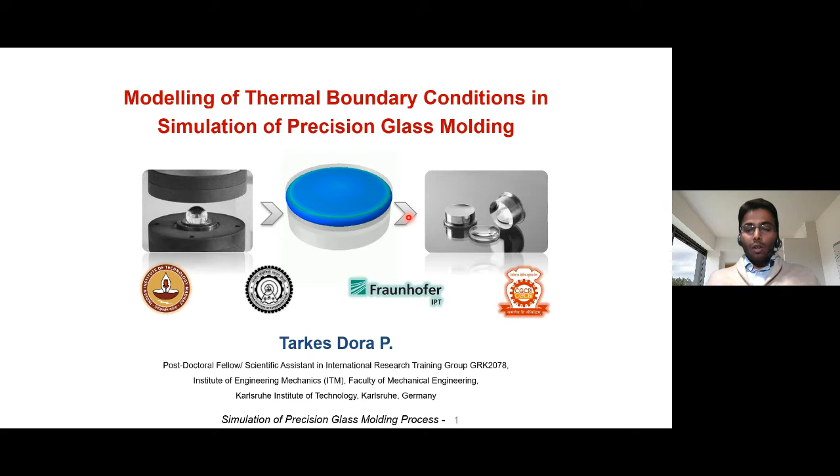With this objective and motivation, I would like to give a short outline of what I will be presenting today. Initially I will talk about the precision glass molding process and the machine, showing how the process happens, which will help you understand the rest of the presentation.

Then I would discuss the challenges in simulating precision glass molding, related to the material model of the glass and the boundary conditions. Then I'd talk about digital photoelasticity of glass, and discuss modeling the heat transfer during the cooling stage of the precision glass molding process, along with some results.

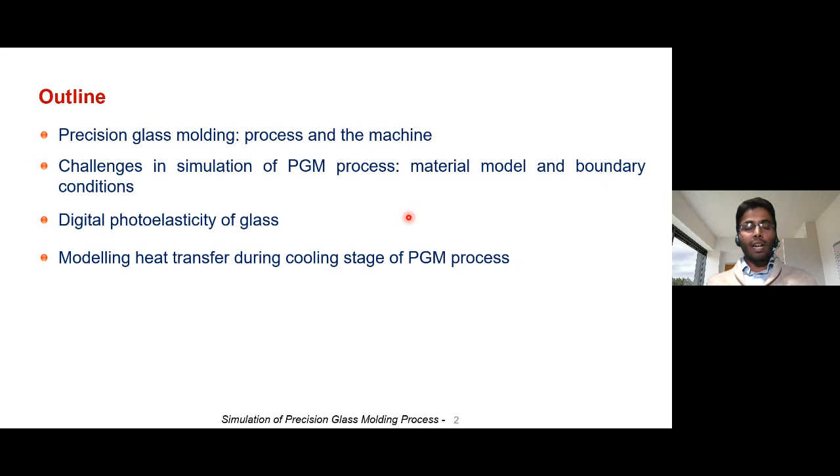Then I'll cover new findings with respect to simulating a sample plano-convex lens. Finally, I'll conclude by discussing the current trends in glass processing technology related to Industry 4.0 and digital twin.

A special message for the bachelor students: you may not understand every aspect of the presentation. That's totally fine, because with your current set of knowledge you may not grasp everything. But you should think about what kind of academic problems you could derive from it, and for your future career and goals, decide what direction you want to go—you could make a mind map out of this.

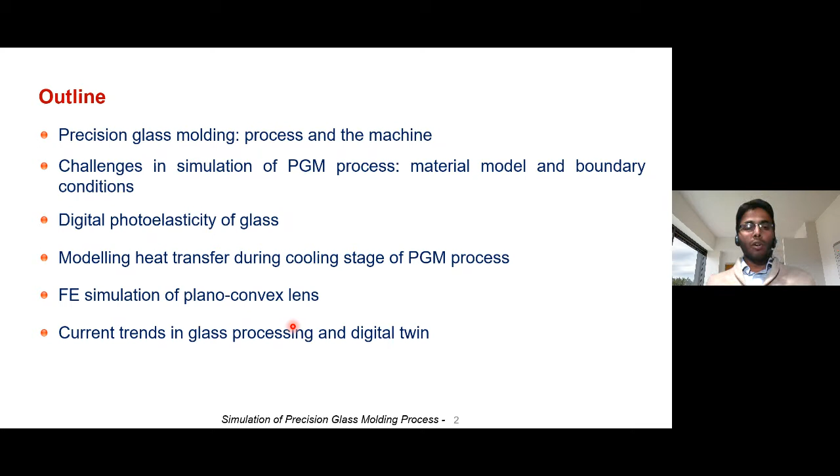Especially in the current trends in glass processing technology and the digital twin, you would get a complete mind map of how the whole engineering community works on fabricating a particular product.

Now let's look into what's happening with the precision glass molding process. Initially we place a glass gob between two molds, an upper mold and lower mold, placed in a nitrogen environment. In this environment we switch on the heaters and heat the whole assembly to slightly above the glass transition temperature of the ceramic glass material.

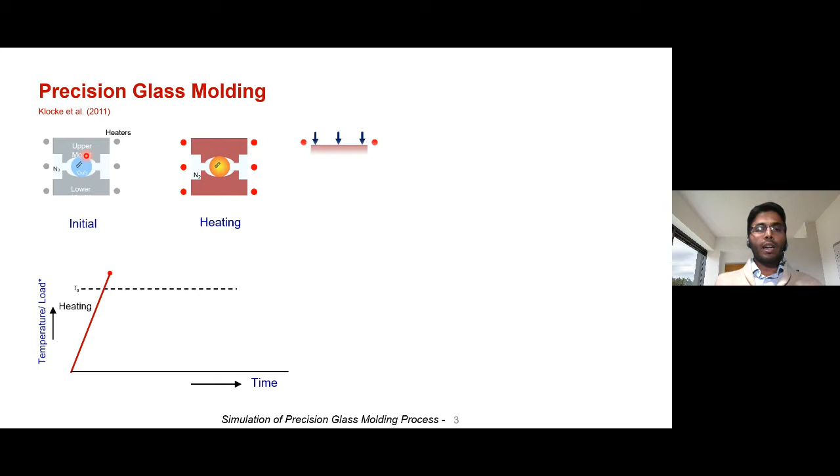Then we press against these molds and keep it for some time at this hot temperature so there is a uniform temperature distribution. After, you cool the glass and the whole assembly by slow cooling, then subsequently by fast cooling, and at the end you would have the lens.

If you take a closer look at the surface of the lens and the surface of the molds, you would see something like this. Looking carefully at the profile of the lens, in blue color, and the profile of the mold, in grayish color, there is a very small deviation, about 9 micrometers.

In an engineering sense, one would say 9 micrometers is totally fine, acceptable—but it is actually not for lens applications, because it has to be precise, since it's used for an optical application, maybe for a microscope or for CD players where you have micro lenses. The surface profile has to be as accurate as possible, less than 1 micrometer. This deviation would induce several defects in the lenses, and hence these products cannot be used for the desired application. So this necessary care has to be taken while fabricating the lens.

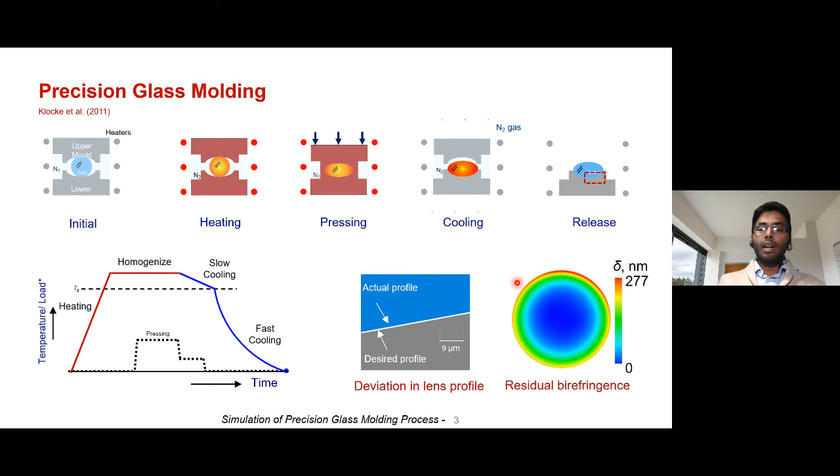After the lens has been fabricated, at the end there are residual stresses locked in the glass material, due to which you would see residual birefringence. This term could be quite new for you—it is the lag in the polarized light rays. If you look into the basics of optics, there would be a phase lag between the polarized light rays, and that is what is indicated as residual birefringence. This birefringence is induced due to the presence of residual stress in the glass material.

So we are not directly quantifying the residual stress, but indirectly quantifying it in terms of an optical quantity. In simple words, it ranges from 0 to 277 nanometers, which is actually quite high for lens applications. The values should be maybe less than 10 nanometers, or 5 nanometers, or close to zero. But if such values exist like 277 or 300, it's totally not acceptable—this could induce a kind of chromatic aberration in lenses, as studied in regular physics related to lenses.

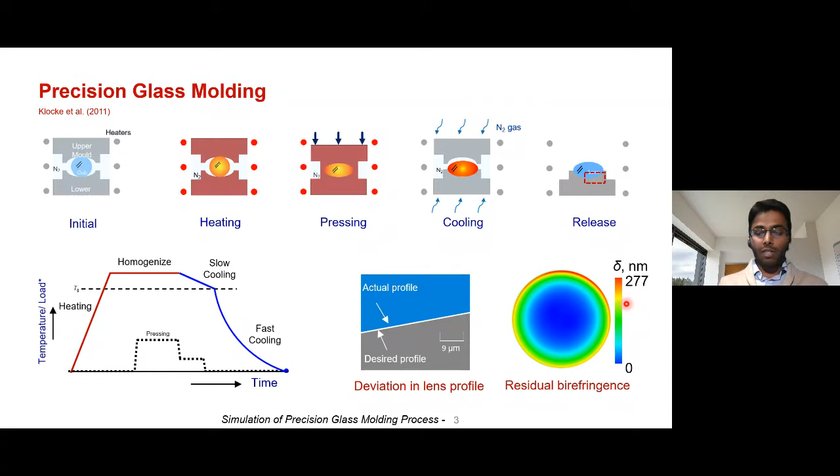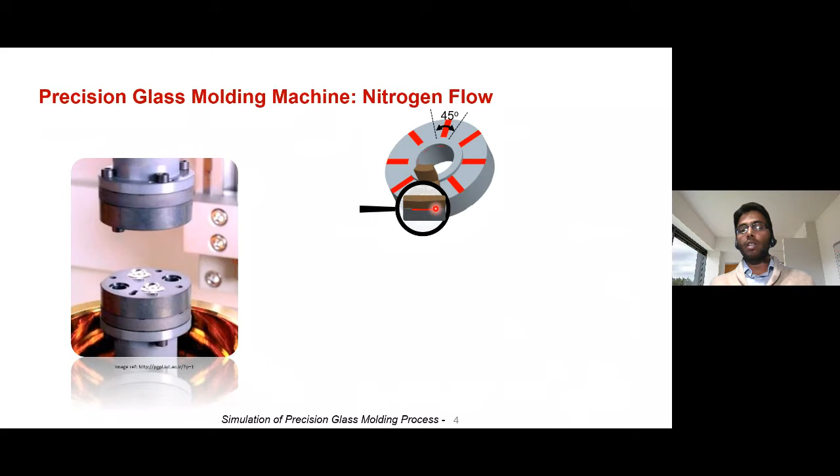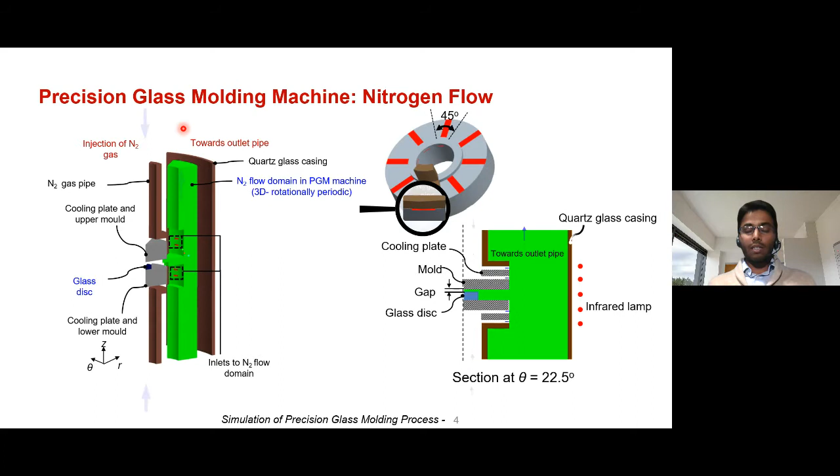This is how the mechanism of the gas flow happens over here. The gas comes in, and through these slots the gas flows out, and then it flows towards upward. There is an outlet pipe through which the nitrogen gas comes out. This is how the nitrogen gas flow mechanism happens, and this is how the whole process happens, and this is the machine details. Now, with this note, we will try to look into the aspects or challenges with respect to the process simulation of precision glass molding.

Typically, if anyone has done a simple finite element simulation, in very simple terms, for a simple finite element simulation you need basically a material model to capture the behavior, how the material behaves at high temperature or low temperatures. Then you need boundary conditions, mechanical boundary conditions as well as thermal boundary conditions. Then the whole boundary value problem is defined, and it is solved numerically. I'm not discussing the numerical part, but now let's look into the material model aspects.

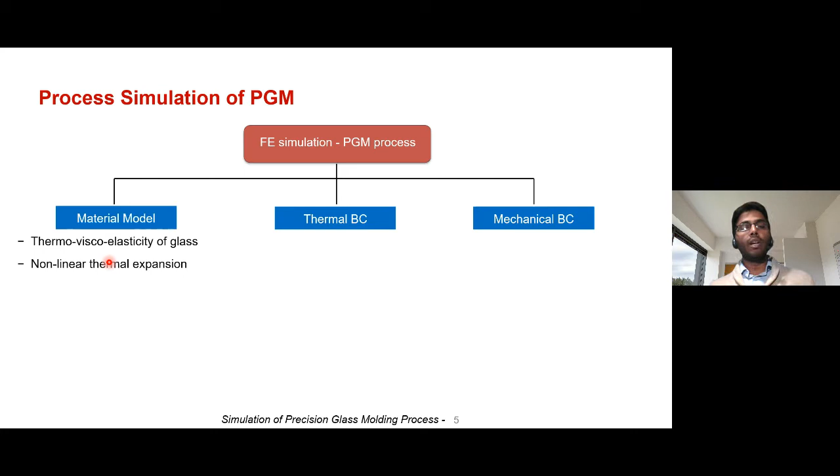So how does the glass behave when the whole pressing operation is being done? At room temperature it is elastic, at high temperature it is going to become soft, something like viscoelastic. It has got a rate dependent behavior, and then again you are cooling it, and the material is transiting to elastic behavior. So the whole transition happens: elastic, viscoelastic, and back to elastic. This whole transition has to be captured. So let's look into the material model in details.

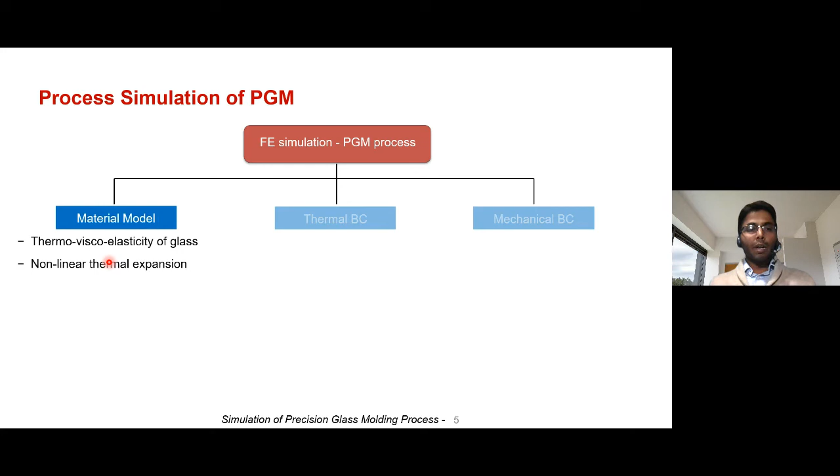Here I'm showing you the constitutive relations for the glass material. If one is aware of simple elastic relations, sigma is equal to E into epsilon. For a three-dimensional problem, you have all the tensorial quantities now. You have second order tensor and the fourth order tensor, stiffness tensor. So the strain tensor is going to be over here. These are the elastic strains, which are stored as energy when you compress the material.

There is the energy stored in the springs. In order to compute these elastic strains, you need to subtract the total strain with thermal strain and the viscous strain. For the viscous strain, I'm assuming the fluidic behavior follows a Newtonian kind of fluid, and you have a stress-strain relation for it, a stress versus strain rate relation.

Here I'm considering that the deviatoric part of the viscous strain tensor is participating in relaxation, or in other words, the flow behavior is happening there due to the deviatoric component. That is why you have a dash over here, and this is the relation we use. Once you substitute sigma here and do a little readjustment, you can express it in terms of stress relaxation time.

I'm using a generalized Maxwell model to capture the viscoelastic behavior, and tau alpha indicates the relaxation time of each Maxwell branch. I'm indicating the Maxwell branch with a scalar quantity G, because only the shear components are participating in the relaxation behavior.

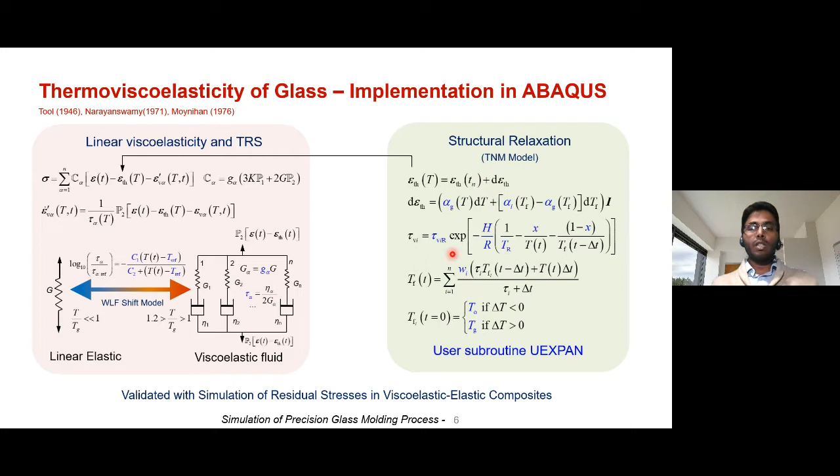If you look at the thermal strain specifically, there is a non-linear thermal expansion happening in the glass material. This is taken into account using the Tool, Narayanaswamy and Moynihan model. This is a very classical model widely available in the literature, and one can look into the details of it. I'm not going to explain the mathematical aspects. These nonlinear effects are taken into account using this model.

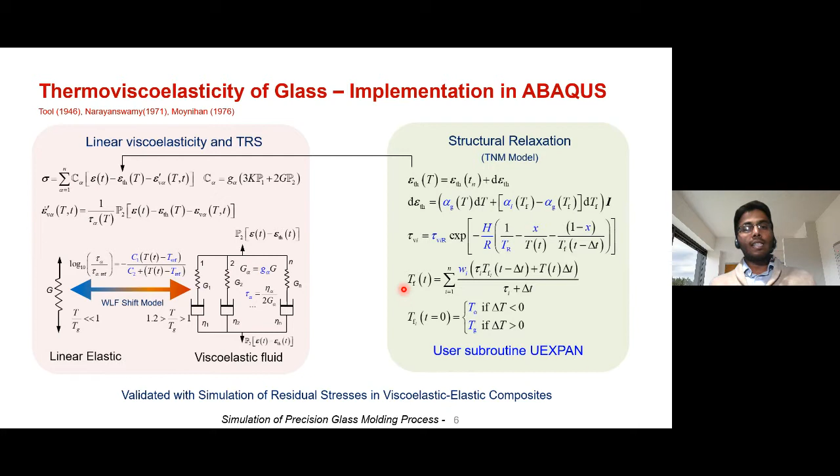Here we evaluate a temperature called fictive temperature. This is not a kind of physical quantity, but a kind of artificial quantity, which indicates an artificial temperature present in the glass. If you are able to compute this artificial temperature quantity, you would be able to capture the nonlinear expansion behavior of the glass. Without getting into mathematical details, I would like to explain physically what is actually happening there, the nonlinear expansion, where does it come from.

If you look at the graph of specific volume versus temperature for a typical glass, the glass would show something like this. At very, very higher temperatures, it is going to behave like a liquid. At intermediate temperature range, it is going to behave softened, like a viscoelastic. At room temperature, it is completely linear elastic.

So what happens in the linear elastic regime when there is a temperature change at a particular material point? Whatever discussion is being done, this is at a particular material point. What happens when the temperature, let's say, suddenly cools from 30 degrees centigrade to 20 degrees centigrade - it is in the linear elastic domain. At room temperature, the vibrational configuration, the vibrational modes of the molecules of the glass material, changes instantaneously, and this leads to instantaneous thermal expansion of glass.

Whereas at higher temperatures, the structural vibrational change is not so important; structural change mechanism comes into play. When I say structural change, it means the molecules of the glass, the bonds, break and reform again, and this process happens very instantaneously. When I'm cooling at a very high temperature, let's say maybe 1500 degrees centigrade to 1400 degrees centigrade, there is a structural change happening very instantaneously.

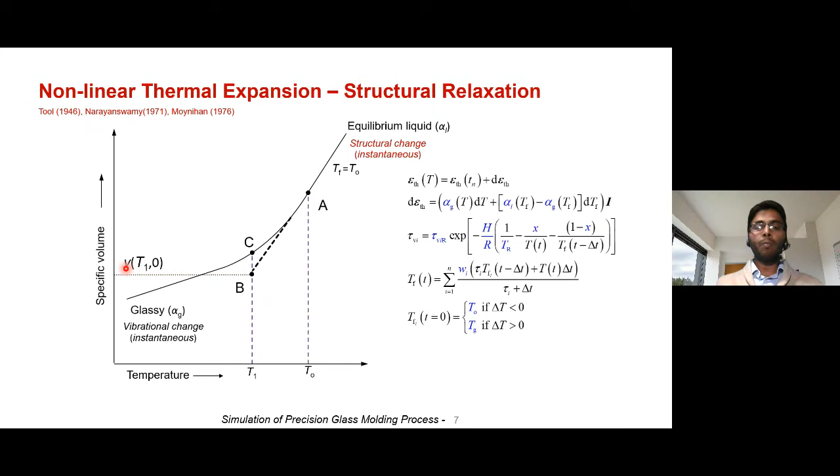But when I'm cooling it from T0 to T1, suddenly at that instant the specific volume is going to remain a specific value. And if I check the property after 30 minutes again, it is going to change. It's not going to remain constant.

So at intermediate temperature, you have vibrational change as well as structural change. The structural change happens due to time, it's a time dependent process, and due to which you have the time dependent effects during the cooling process.

If you draw slopes of the glassy line and the equilibrium liquid, the intersection of this point is called the glass transition temperature, and it depends on the cooling rate. And the intersection of the line after some time, if I draw a line slope parallel to the glassy line, the intersection is called the fictive temperature.

So this is a kind of physical meaning attached to this fictive temperature, but it never actually exists in the glass. It's not a measurable quantity.

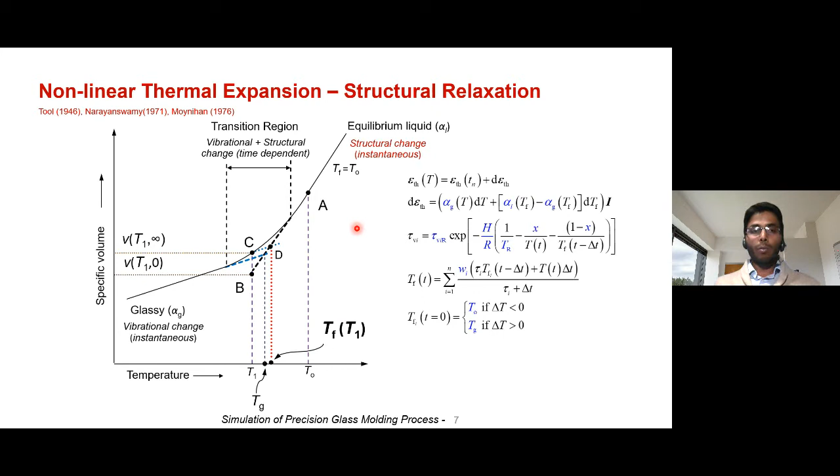So this is how nonlinear effects are taken into account by the tool known as the Tool-Narayanaswamy model, and this is what is being done in mathematics. So this is what I have discussed with respect to the material model.

Now let's look into the mechanical boundary conditions. I'm not going to discuss how the boundary conditions are experimentally measured.

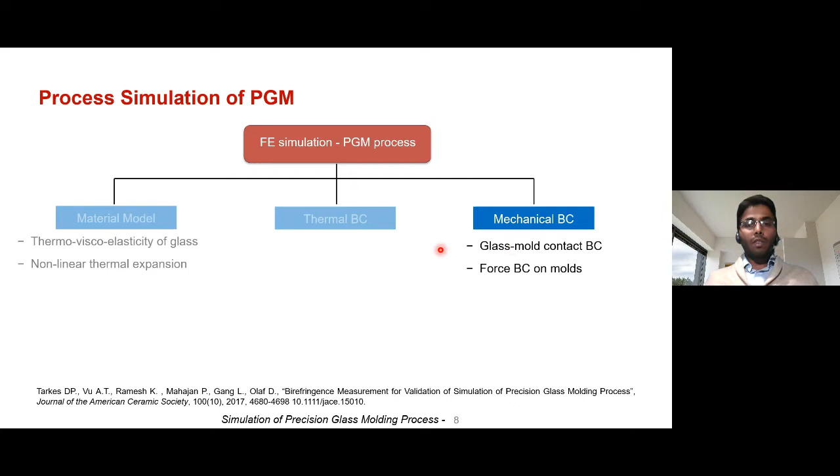And if you look into the thermal boundary conditions now, there are two issues here. One is the glass nitrogen interaction, which could possibly happen depending on the product and its size. If the whole mold assembly is closed, there is no glass nitrogen interaction. But if the molds are open, there is a glass nitrogen interaction effect. So it depends on the situation, but this boundary condition has to be taken care of.

This is one aspect. And if you look into the literature, there have been several heat transfer coefficient values taken. They assumed the mode of heat transfer is natural convection or forced convection, and based on that, they took several values. I'm not citing all the important references here, but you can look into the paper for all the details.

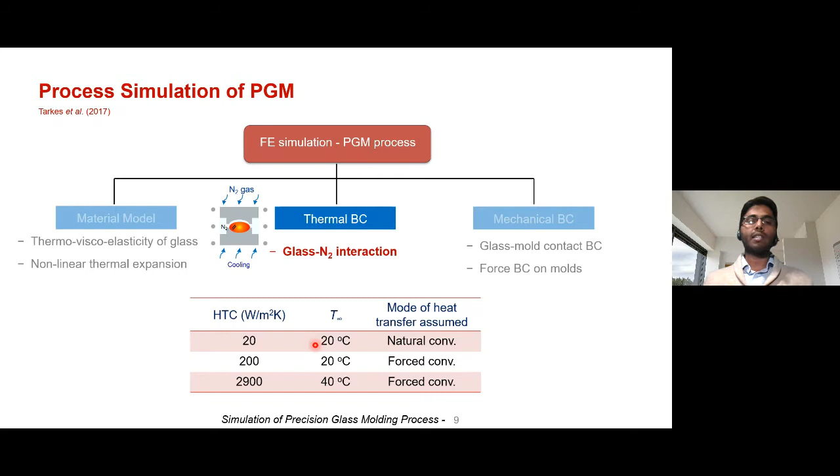What we actually did is we simulated the nitrogen gas flow mechanism to investigate what mechanism is happening during the cooling stage. So if you look into this slide, as I have already explained the details of the nitrogen gas flow, how it happens here, I'm showing only this region, close to the region of the molds.

So there is a circular kind of glass disc placed in between the molds, and for this kind of geometrical arrangement, the simulation has been done because it is quite simple and perfectly rotationally periodic, so all the analysis becomes quite simple to handle.

For a flow rate of 80 liters per minute, you can see that the nitrogen gas is exiting from here. It is striking the quartz glass casing, and then nitrogen gas flow happens. The temperature of the molds and the glass are at 823 kelvin, and you can see there is no forced convection happening here, because the gas is at 20 degrees centigrade and the glass is at 823 kelvin. If there were forced convection, you would expect a blue color over here in this region.

I'm showing the contour plots for a temperature between 20 degrees centigrade to, let's say, maybe 600 degrees centigrade. Here you can see that there is gas conduction actually happening, and as you move slightly away from this region, there is a gas flow happening. So there is gas conduction till this region, and after that there is gas flow, and then the hot gases are being evacuated out.

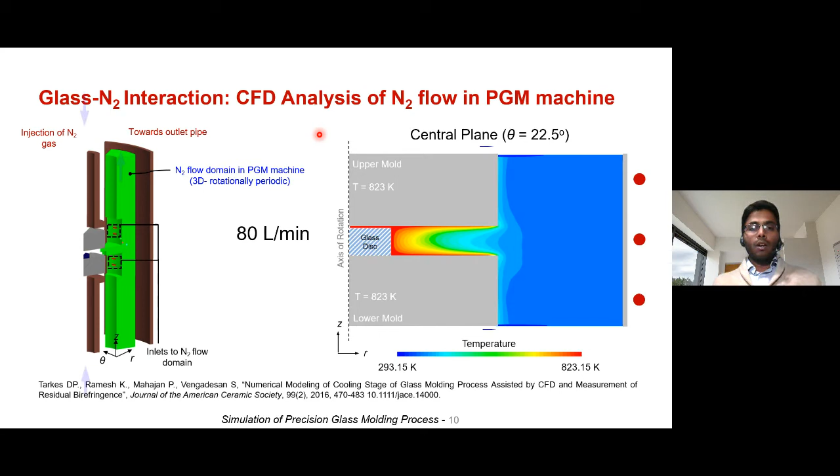This was a contribution from my side into the literature of the precision glass molding process. And then there is a second thermal boundary condition, which is the glass-mold interaction. During the pressing operation, there is glass-mold heat transfer happening, and also during the cooling stage, due to which the glass is able to cool down.

In literature, again, there are several values being used, and there were hybrid kind of experiments done - hybrid in the sense coupled experiment as well as numerical simulation. Based on these experiments, they were able to find out some values. For the hybrid, air conditions, when there is no load acting on the molds, the heat transfer coefficient was found to be 250, which was useful for our simulations, which I'm going to explain in the next slides.

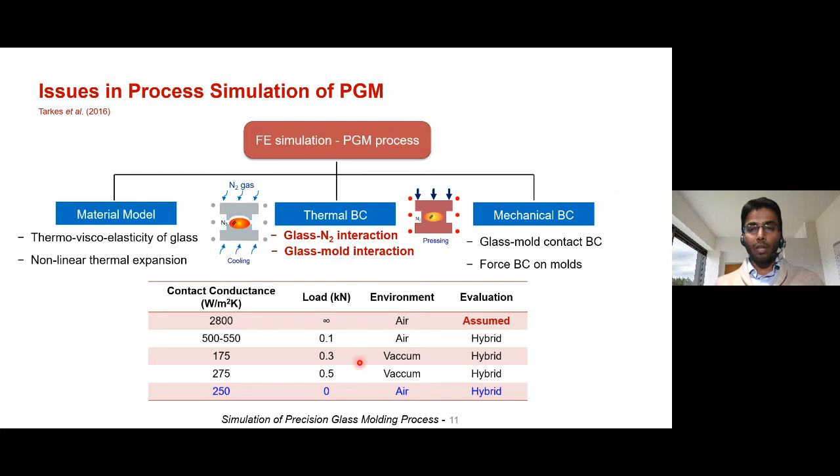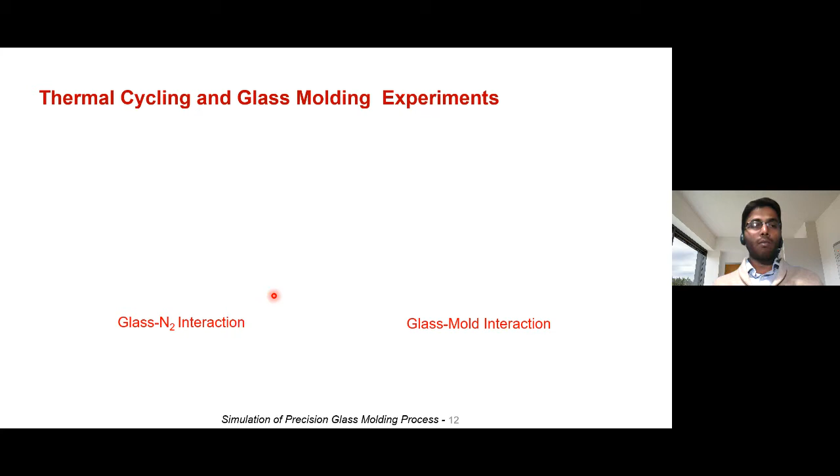Then, in order to address these thermal boundary conditions, we planned two sets of experiments. One was a thermal cycling experiment, and the second was a glass molding experiment where we fabricated a lens. We tried to address the glass-nitrogen interaction through the thermal cycling experiments, and we wanted to address the glass-mold interaction by conducting a lens pressing operation. Here you see a plano-convex lens, which we pressed against the molds, and we planned this set of experiments to address the issue of glass-mold interaction.

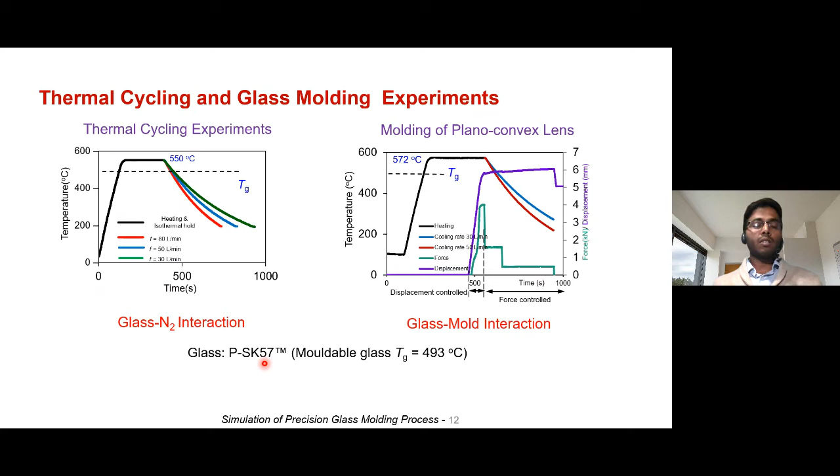So these are the temperature cycles and the load displacement curves - I'm not going to discuss them in detail, but these are the information we have from the experiments. The glass we selected is PSK57 commercial glass, manufactured by Schott, which is a special glass used in lens molding. These experiments were performed at Fraunhofer IPT because all the expensive experimental facilities and required tools were available there.

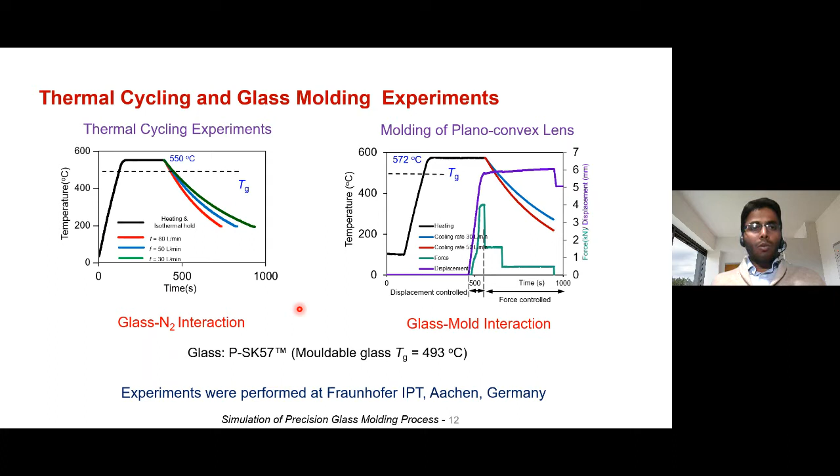Once we had the fabricated samples, we planned to measure the residual birefringence, or in other words, residual stresses in the lens. We use a circular polariscope arrangement to quantify the residual stress. Here we have a polymer specimen - before I show you what happens with the glass, generally these experiments are conventionally done on polymer specimens which exhibit photoelastic effects. These are epoxy specimens. When you apply external load on it, you would be able to see photoelastic fringes something like this.

The stress strain and the stress optic law, which relates the optical information to the stress information, is given by this relation. Delta is nothing but the birefringence, what I showed you in the earlier slides, and C is the photoelastic constant. So if you know these two quantities, if you know C, then you will be able to quantify the stress quantity if you know birefringence.

For polymer specimens, you have very high value, so you see a lot of fringes. But when you see a glass disc subjected to compression, you won't be able to see any fringes, because typically for lens applications, the photoelastic constant of glasses are in the range of 0 to 4 per TPa. This is a separate domain of material science research, where they are trying to get special types of glasses which have very low photoelastic constant. That's a domain in material science research.

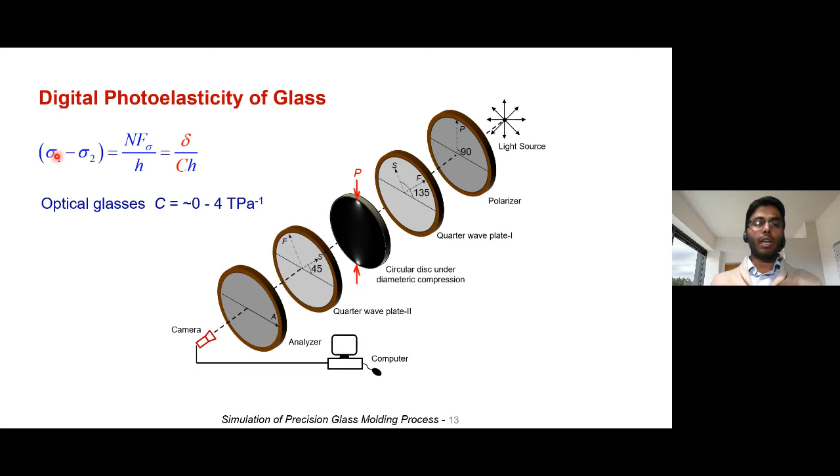And so this we need to measure, for converting stress information to optical information, to stress information. Either of the way, we need this photoelastic constant.

And for measuring the birefringence, we had the experimental setup, where the lens was placed in a refractive index matching liquid, so that the light rays can travel in a straight line. There is no refraction happening.

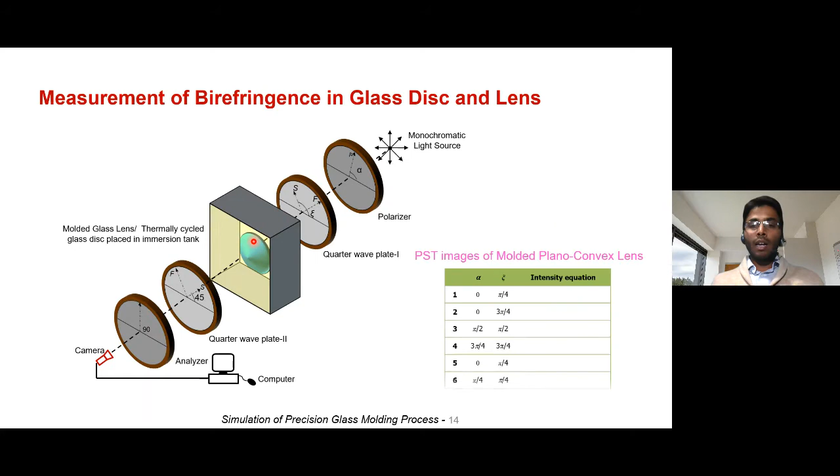There is a phase shifting technique where you capture 6 photoelastic images, and you have the intensity information from experimentally measured, and you have analytical expressions which come from the theory of photoelasticity. I'm not getting into the details of it. Once you do mathematical calculations on it, you would be able to compute the birefringence as well as the principal stress angle theta, what you study in solid mechanics.

This is for bachelor students who don't understand. So these are the two quantities what we can measure directly.

Then we performed experiments on the thermally cycled glass disc. Similarly, we took 6 phase shifted images, and you can see that since the glass disc has very high residual stresses, you can see clearly a gradient of fringes.

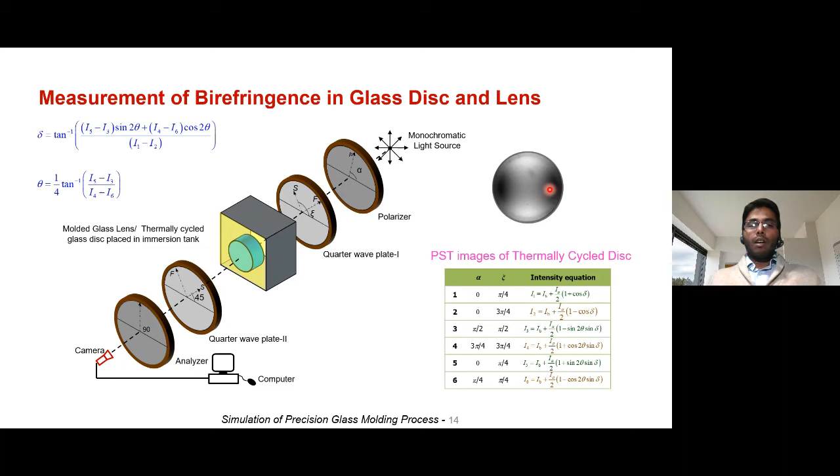For performing all these experiments, we had a customized experimental setup at IIT Madras. This is the polariscope what we have. We have the light source, incoming light source over here, and we have the camera to capture the images. The lens was placed in the refractive index matching liquid, and then all the photoelastic experiments were done.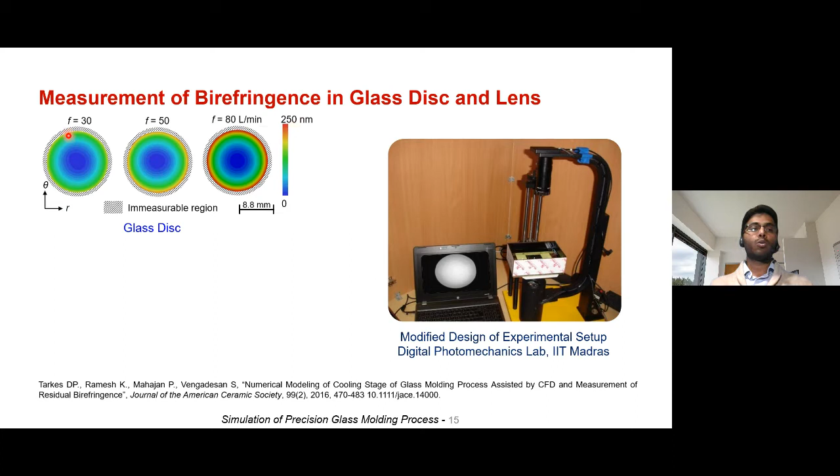These are the set of results for the glass disc. What you can see here is a very nice axisymmetric distribution of residual birefringence. From this, there was an input to the finite element simulation that we could make as a 2-dimensional axisymmetric simulation. You can see that the birefringence values are quite high, because the nitrogen gas is directly interacting with the glass disc during the cooling stages, and there is a high amount of residual stresses. So that is what you see here at 30 liters per minute. As the flow rate is increased, the residual birefringence increases.

Similarly, we did the experiments for the lens, and you can see that for 30 liters per minute, you have very low birefringence, and for 50 liters per minute, you have a little bit of high birefringence over here. So this is for a plano-convex lens.

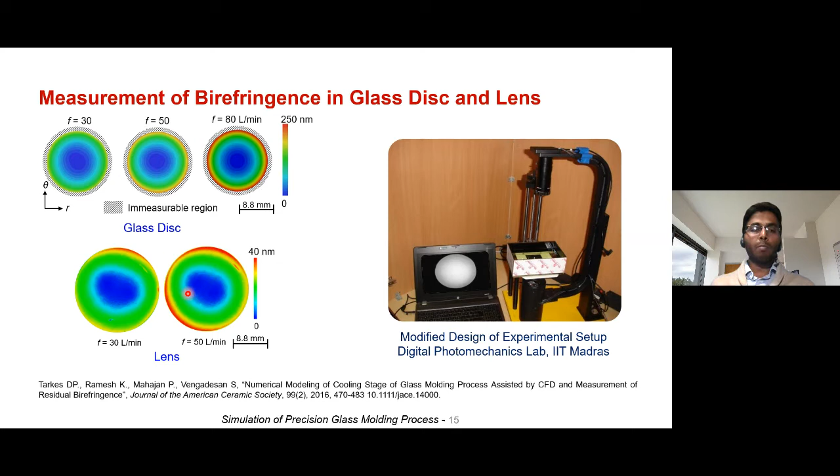Now what is the next set of task for us? We have residual birefringence information from the experiments. We have finite element simulation where you can compute residual stresses, but you cannot compare both of them directly. You need birefringence also from the finite element simulation so that you can compare with the experiments directly. So how do you do that?

By taking a scalar triple product, I can find out which particular element a point lies in, and based on this interpolation function, I can interpolate the stress data computed at the integration points. So I'm able to map the whole domain of the lens in this artificial image, and I integrate the stress information over the thickness.

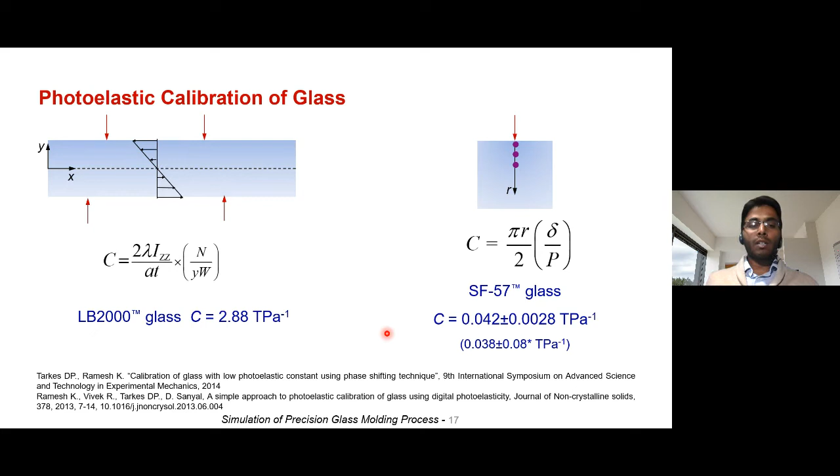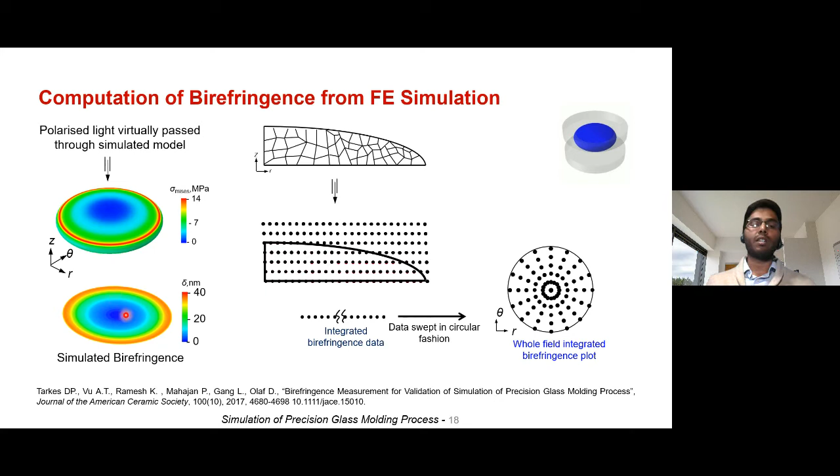Once we have this photoelastic calibration constant from the experiments, you can substitute it back in this equation and compute the birefringence data. So this data is the simulated birefringence data, not the experimental ones, but it can be compared directly with the experiments.

Now if you look into the finite element simulation, we have all the boundary condition information. The only missing information is how the nitrogen and glass are interacting and how to take into account those effects. So instead of defining any heat transfer coefficient, I defined an equivalent heat transfer coefficient which takes into account this heat transfer mechanism.

We do not have any initial value for this heat transfer coefficient, but I used a lumped heat transfer analysis, which bachelor students might have studied in heat and mass transfer subjects. Using this lumped system analysis, I have the temperature as a function of time and the initial temperature information from experiments. By doing a curve fitting, I compute this exponential constant A, which is related to all the geometrical and physical properties of the glass, already known.

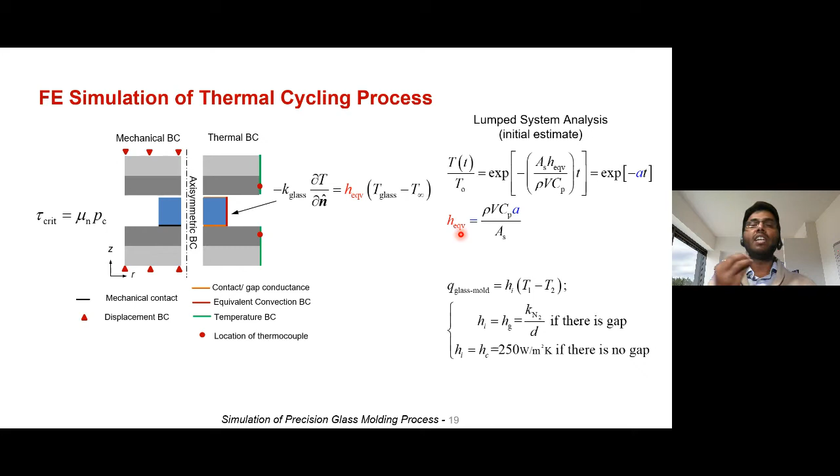From there, I can estimate the initial value of the heat transfer coefficient, and I gave it as input to the finite element simulation. I simulated the birefringence data and compared it with the photoelastic experiments, and clearly it doesn't match very well. So using a reverse approach with the experimental data, I tweaked the value of H equivalent until it matched the experiments.

We found that for a flow rate of 50 liters per minute, the value was about 15 watts per meter square Kelvin. Similarly, for different flow rates, the values were estimated as shown in this table. For more details, one could refer to this paper published in the Journal of American Ceramic Society.

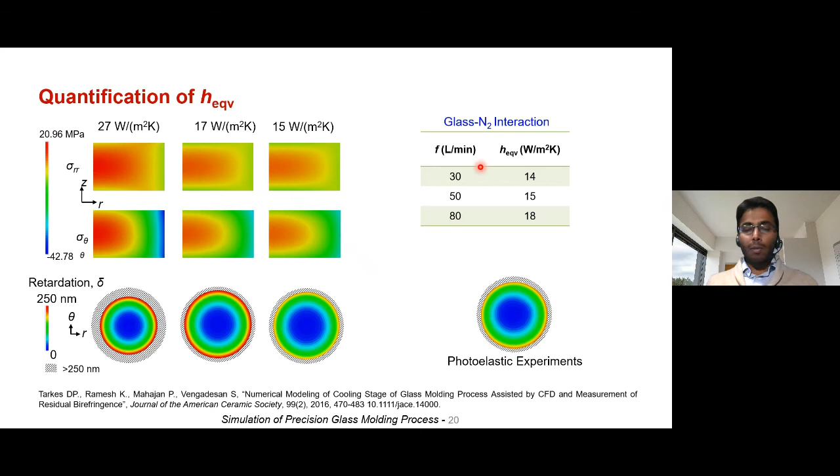This was the understanding we had with respect to thermal cycling experiments. Now we wanted to address the issue with the plano-convex lens: how do we handle the glass mold interaction boundary condition? This is taken into account—the glass mold heat transfer, contact heat transfer, is taken into account by contact conductance.

If you look into the process cycle, initially the mold is displacement controlled, and subsequently there is a force control system. So there is a control system playing a role during the pressing operation, and this has to be taken into account in the finite element simulation. This was done by defining a user-defined subroutine UAMP in Abaqus, through which this control system, along with the force-based and displacement-based control, was taken into account.

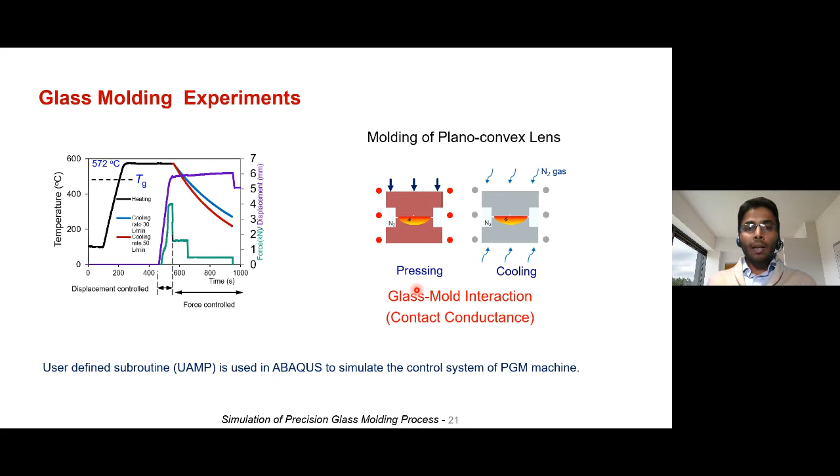To quickly wrap up, we used pressure independent contact conductance, and these results didn't match very well. When we took the difference between the photoelastic and simulated birefringence data, the error difference was quite very high.

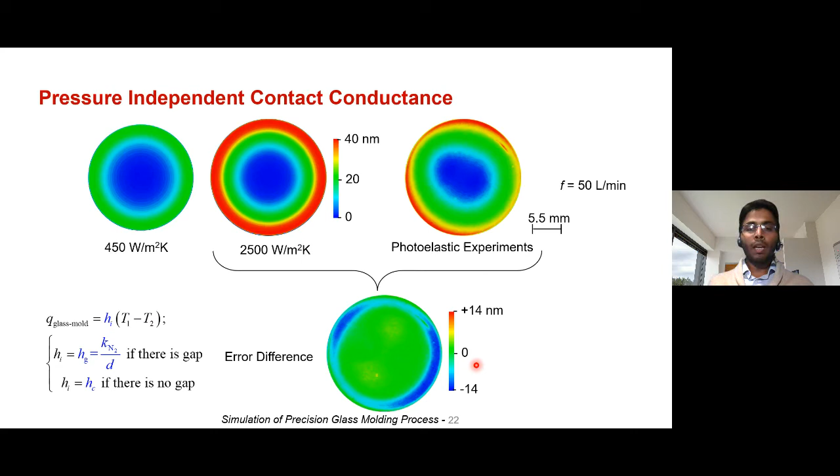But when we used pressure dependent contact conductance, changing the value based on contact pressure during the pressing operation, we found that for a critical value of 3 MPa, using a lower value below it and a much higher value beyond it allowed us to match the birefringence information as well as the force-displacement curve information from experiments very precisely.

This curve fitting was done for a flow rate of 50 liters per minute, and we then tested this value as a trial experiment for 30 liters per minute. It still worked very well. Based on this, we published these outcoming understandings in another paper in the Journal of American Ceramic Society, which one could refer to for all the details.

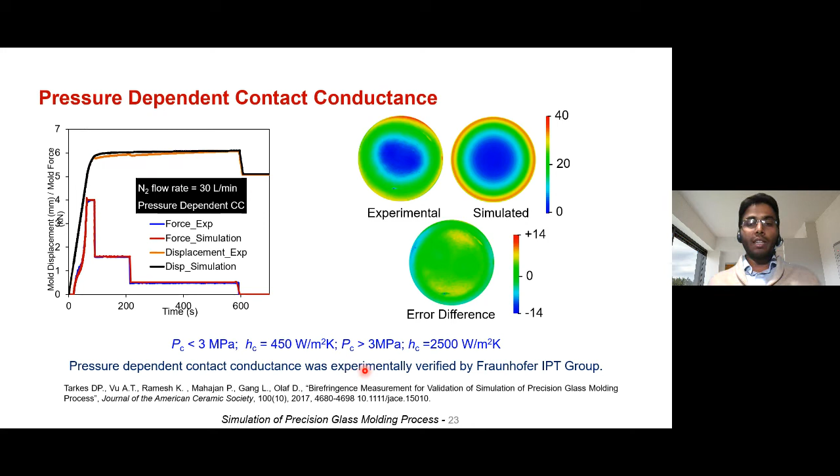These experimental values were then verified against the curve-fitted values. The major conclusion we came to understand is that the heat transfer mechanism during the cooling stage is basically by heat convection, combined with a flow field that evacuates this heat out. This was modeled using an equivalent heat transfer coefficient, and for different flow rates we obtained the values shown here.

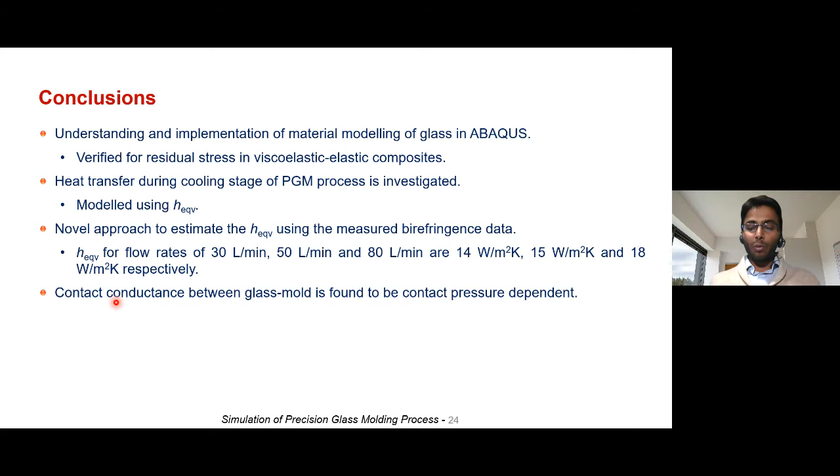For glass pressing operations, pressure dependent contact conductance has to be specifically used for modeling this simulation, and these were the major outcomes from our research. This is totally fine, and this is all what we have done—we had gone deep into the issues of glass molding operation. But the curiosity is: what's next? Is that all, or is there something beyond this?

For the next 2 minutes, I'm not going to speak anything. I would like to play a video, so please watch it carefully. I would request the bachelor students especially to think over what kind of problems can be derived from this process. I would also mention that this technology has been developed in the last 5 years, and there is no current simulation technology able to simulate this process. Please watch the video for the next 2 to 3 minutes.

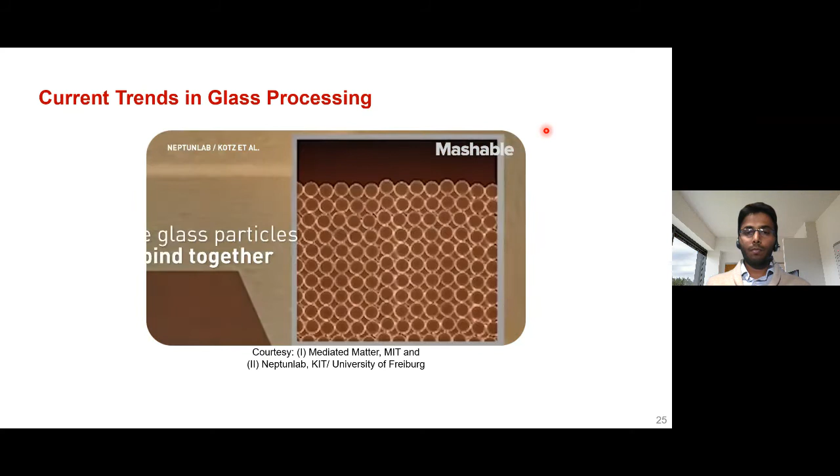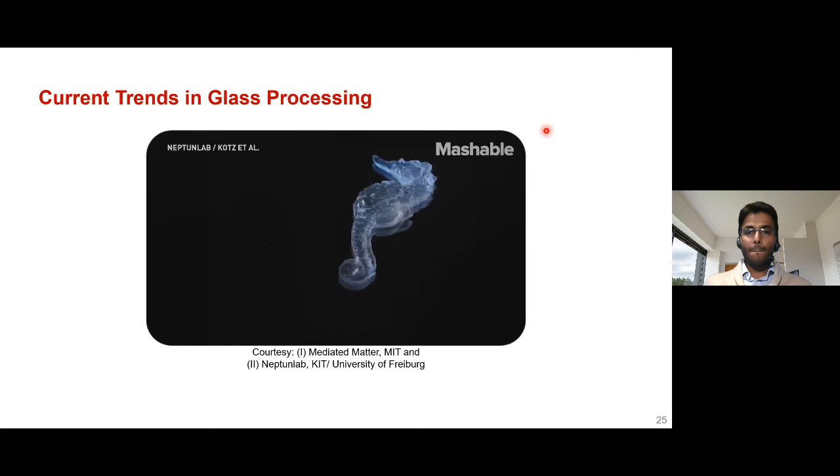So I hope you might have watched the video quite deeply.

I hope you watched the video quite deeply. I have shown you two scales of products fabricated by additive manufacturing: one is a very large scale product in meter scale, and the other is miniature scale, maybe in order of centimeters or so. There have been new processing technologies for fabricating glass-based products, and attempts have also been made to fabricate lenses. This is the future coming direction.

The major challenge I want to address to the whole community, especially students, is that there has been no robust simulation technology which takes into account all the aspects or difficulties of the additive manufacturing process, because the geometrical domain is growing as you fabricate the product. Secondly, depending on what scale of product you are manufacturing, the architecture or microstructure of the whole product, and of each layer, is also evolving as printing happens. This also has to be taken into account.

So if I make a map of different stages of the process, you can look into these pictures over here.

So in the processing stage, the material is being heated and then layers are being printed. There is a complex heat transfer happening here while the printing process occurs, and that has to be taken into account.

Second, the material is transiting from fluid phase to solid phase. How do we model this complete transition? There is a domain where fluid mechanics and solid mechanics have to interact with one another. They cannot remain separate in their own respective domains, they have to interact. This is one of the simplest challenges I'm trying to mention here.

If you look into still more detail, there are n number of challenges to address in the processing stage of additive manufacturing.

Now once you do that, that's fine. You do the processing and then fabricate a product, that is out. So what happens to the product? Generally in daily life, you take this product and subject it to different kinds of loading conditions, depending on the application. You could have dynamic loading, you could have static loading, it depends totally.

If you look into this complex table-like structure which is 3D printed, and take a CT scan of this, this is how the complex architecture looks like. The finite element simulation community knows that modeling this is just impossible with finite element simulation, you cannot do meshing and so on. It becomes computationally very challenging.

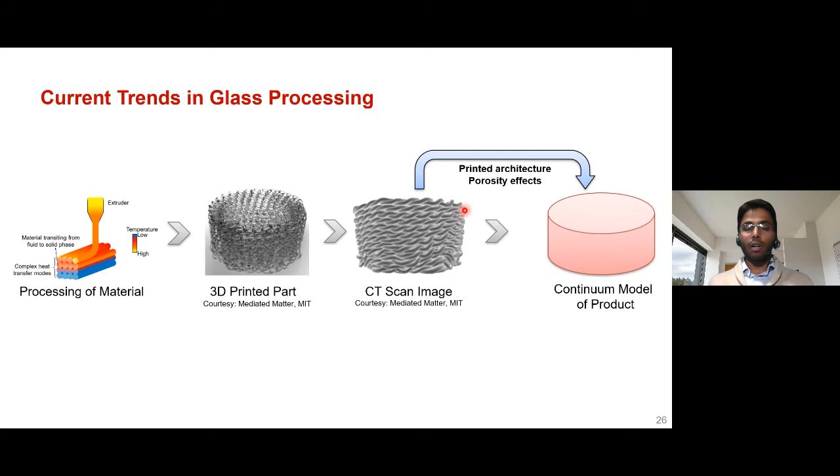So these are the different difficulties at different stages of the product life cycle. Now if you look at the bigger picture, let's not stick to glass specifically, let's think very generically for any product. You can conceptualize this as product oriented research, which people have to pay attention to.

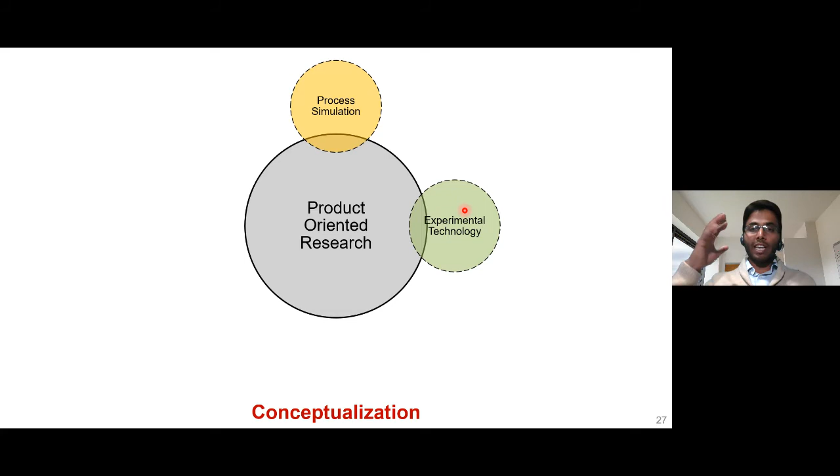Let's say there is a product which has to be commercialized, and there have been several issues in it. There is one domain where people can focus on process simulation. There is a second domain where people can focus on experimental technology, like CT scan technology or material characterization, fracture tests or bending tests, any kind of experimental domain. There is also structural simulation, where you mathematically frame the constitutive behavior of the material. And there is one domain where designing technology people can focus.

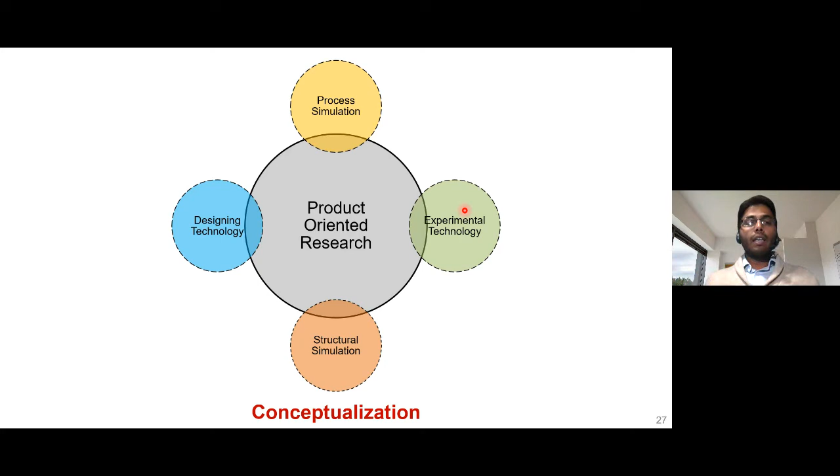So these are the four different domains which revolve around product oriented research. If several academic universities, research institutes, or industries participate with their own expertise and interact with each other, with the common platform being the product, they can nicely interact, and the outcome could be very good, because all the challenges can be addressed well by their own expertise, and this could help the general scientific or industrial community.

I'm not getting into more detail of this. For bachelor students, when looking into different positions in future, if they want to get into academics or some kind of research activity, they should make a mind map of what project to go into and how it would help in the future. That's the bigger picture they have to look into and understand.

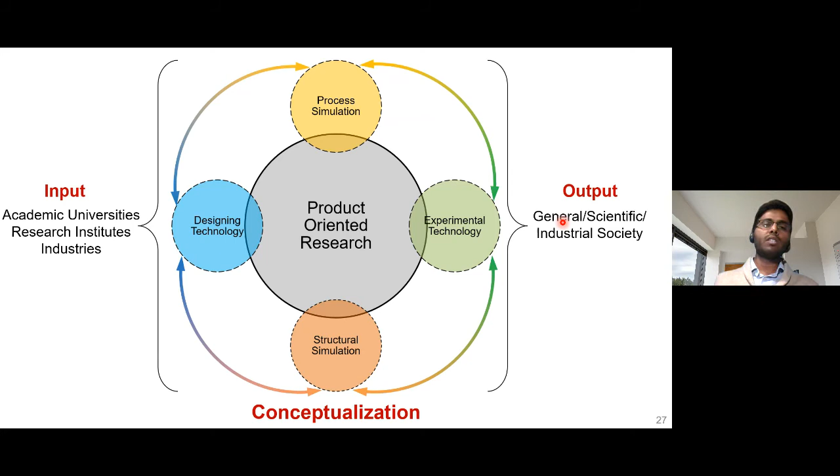This is totally fine, this is what I'm talking about regarding research. But what is the overall outcome, or the still bigger picture out of this? Everyone might be aware of this very recent buzzing word, Industry 4.0 and digital twin. Industry 4.0 is something separate, with several agendas, and digital twin is one agenda which comes under Industry 4.0.

So for a few seconds, I'm playing a video. Just watch this and listen to the important information conveyed in the speech, so please listen to this very carefully.

Digital twins, the innovation backbone of the future, delivering virtual representations of real-world products, systems, and cities.

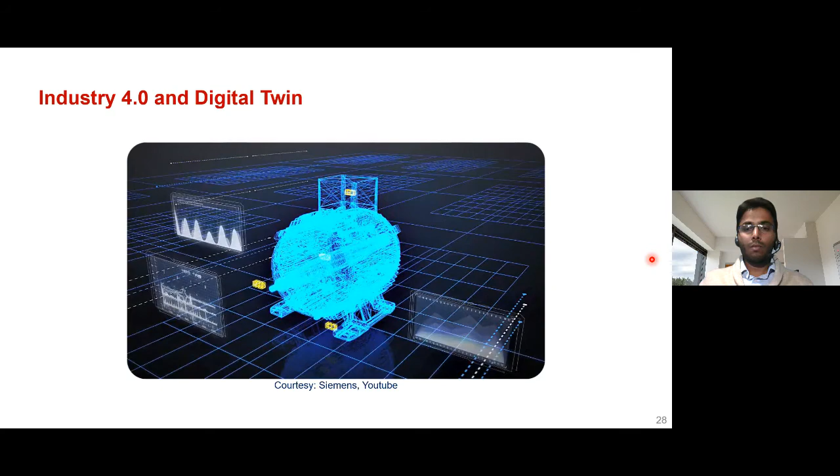For example, the digital twin of an electric motor not only showcases form, but also analyzes functions, from the rotation of the shaft to thermal conductivity to data from sensors and beyond. What's more, the digital twin continuously evolves, thanks to the flow of data, user experience feedback, and new input.

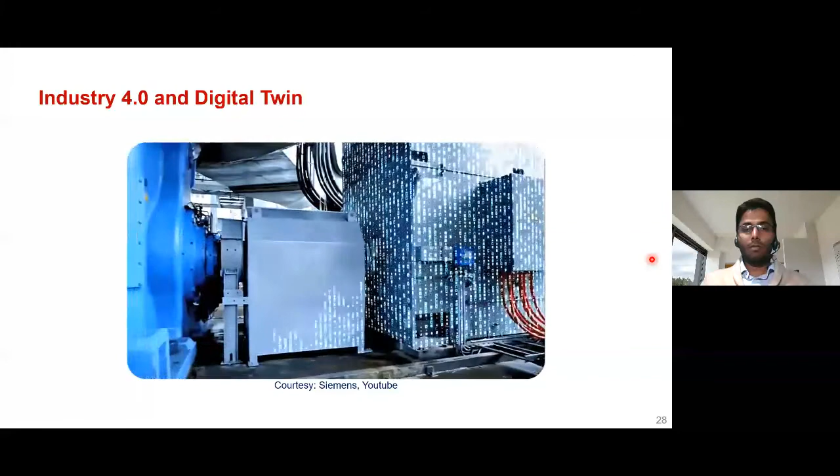It's greatly impacting development, production, and operation. In development, a product's behavior can be simulated and tested long before a physical prototype has been built.

So the key important message I hope everyone has heard: there are 4 domains of engineering, I know that, but they never interact with each other - electrical engineering, computer science engineering, mechanical engineering, and civil engineering. All these 4 groups have to come onto a single platform, which is Industry 4.0 and Digital Twin. They cannot be separated out. All of them interact with each other, and then the whole Industry 4.0 can evolve when all of them interact.